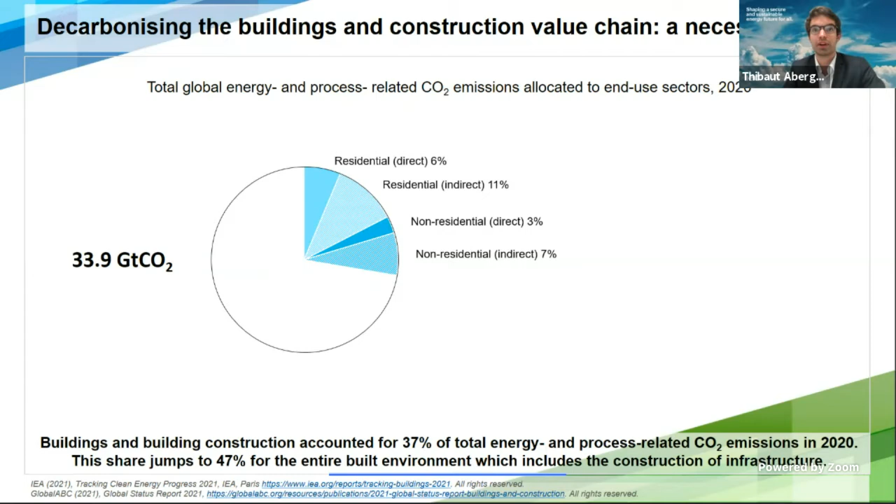Total global energy and process-related CO2 emissions amounted to nearly 34 gigatons CO2. Of this, 27% is due to the operational phase of buildings, whether directly through the burning of fossil fuels in buildings to produce heat for space heating, hot water production, and cooking, or indirectly through electricity and commercial heat generation that is later going to be used in buildings. But as Roland highlighted, we mustn't forget the buildings construction industry, the embodied carbon, mostly from the manufacturing of building construction materials, which adds 10% on top of operational emissions. It brings the carbon footprint of buildings to 37%.

But construction is not only about buildings, it's also about roads and bridges and dams, tunnels, and many things. And the other construction industry is responsible for another 10% on top of this. It means that the built environment, together with buildings and infrastructure, is responsible for 47% of total global energy and process-related CO2 emissions. So it's an understatement to say that buildings are important to the energy transition.

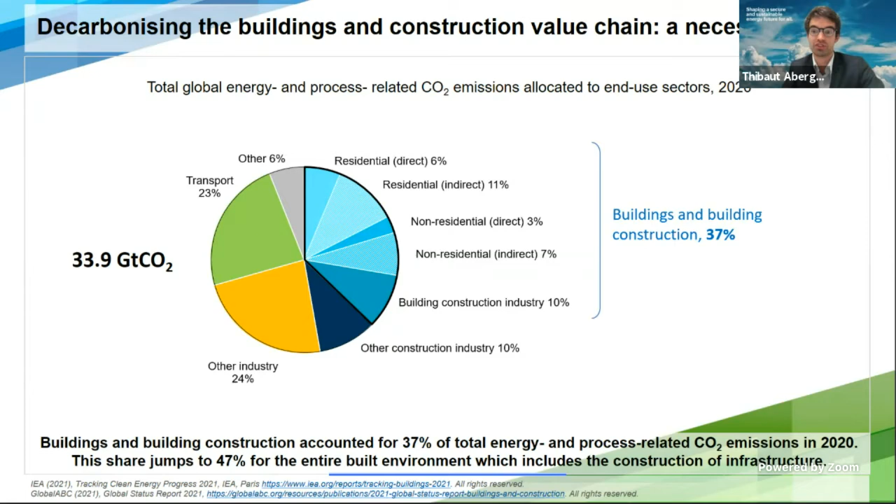The global energy transition as envisioned in the net zero emissions scenario is underlying a massive market transformation. By end use, for example, space heating today represents most of the final energy use, but its share is drastically reduced by 2050 as envelopes are improved. On the contrary, electric appliances and space cooling, for example, are growing as energy efficiency gains cannot offset the growth

for energy service demand. On the fuel side, it means that electricity becomes the primary driver of fuel transformation, with electricity contributing to nearly 2/3 of total final energy use in 2050 in the NZE scenario. Not only the growth of space cooling and electric appliances contributes to electrification, but also the moving away from fossil fuel technologies, as about 45 exajoules of coal, oil, and natural gas were used in 2020 to power

buildings. The electrification trend needs to be complemented with higher shares of renewables, which is direct biomass, solar thermal, and geothermal, as well as an expansion of district energy systems. The final trend that needs to be highlighted in the NZE scenario is the phase out of traditional use of solid biomass, which is responsible every year for 2.5 million premature deaths due to household air pollution. That's more than malaria every year.

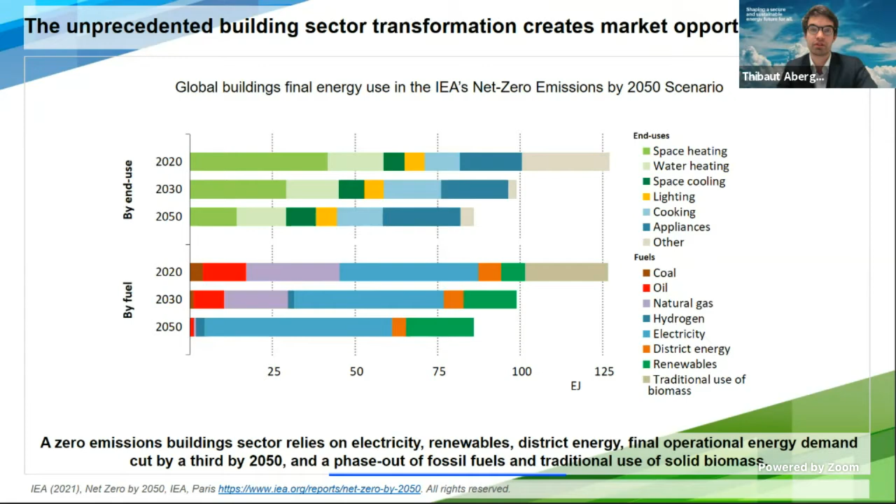It means that by 2030, we are complying with the UN Sustainable Development Goal number 7 on achieving clean energy access. And all of this relies on an overarching target, which is deploying zero carbon ready buildings. A zero carbon ready building is a building that does not need further improvement to operate at zero emissions. The first criteria for zero carbon ready building implementation is energy efficiency.

Today, about 80 countries have mandatory building energy code requirements in place for new construction. But that means that another 2/3 of the countries actually are lacking these mandatory building energy codes, and that last year, the equivalent of the floor area of France was built outside of any regulation. And even if a country has a code in place, as you can see on this graph, more often than not it doesn't comply with a zero carbon ready building requirement.

But in 2030, all buildings for new construction need to comply with this requirement. And on top of this, we need to expand the renovation rate to about 2.5% of the building stock being renovated every year so that we can meet our targets of reaching net zero emissions by 2050. About 50% of the building stock today will continue to be standing in 2050. From an energy efficiency perspective, it means that heating and cooling intensities are going to drop by 50 and 25%

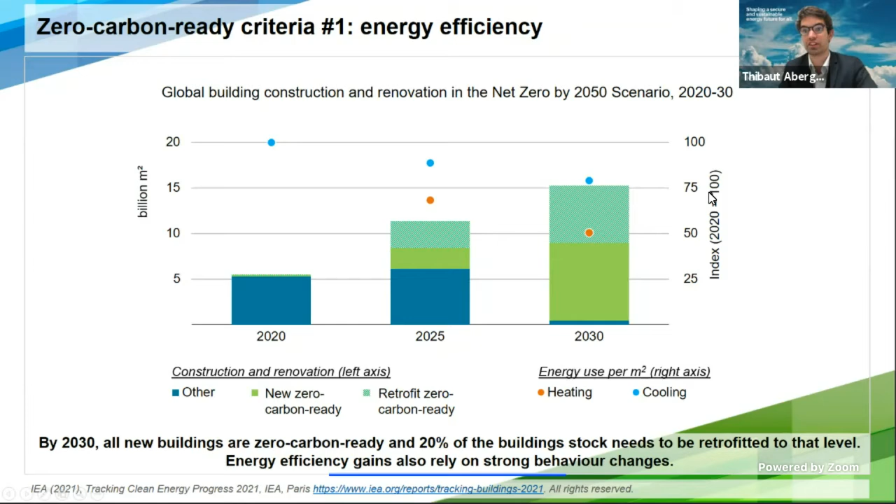respectively by 2030. A second criteria for zero carbon ready buildings is the switch to zero emissions fuels. Today, the global heating equipment stock is dominated by fossil fuels: coal, oil, and natural gas boilers. Altogether, 1 billion units are operating. And these are replaced by cleaner technologies, heat pumps in particular, which are driving the demand for new heat demand.

In particular, they are supplying 50% of global building heat demand in 2050, and they are complemented by solar thermal and geothermal technologies and district energy systems. The share of hydrogen remains marginal because of its inefficiencies and because of safety issues to convert the gas grid and make it compatible with running on 100% hydrogen.

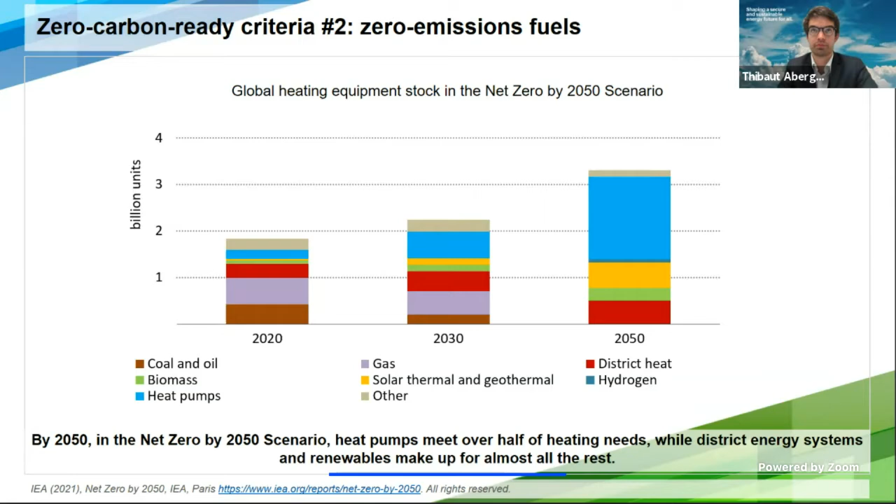A third criteria is to take care of the entire life cycle of buildings and especially reduce embodied carbon. Buildings consume a lot of cement and steel, and this consumption has increased a lot since 2000. Even if it dipped in 2020 due to the COVID-19 pandemic as construction activities slowed down, we see that it can rebound to a level that is unprecedented.

And in the net zero by 2050 scenario, material efficiency strategies allow saving approximately 10% of the total steel and cement demand relative to baseline trends. These material efficiency strategies span across the entire buildings and construction value chain. But the main lever to reduce material use is extending buildings' lifetime through enhanced renovation, but also from the design stage with higher quality components that will make the building's lifetime longer.

It's also a target to make buildings more flexible, to be able to be repurposed at the end of their lifetime. For example, transforming a household into an office to have more flexibility in the repurposing of buildings. Of course, these strategies are complemented with the decarbonization of the industry sector for the production of these materials.

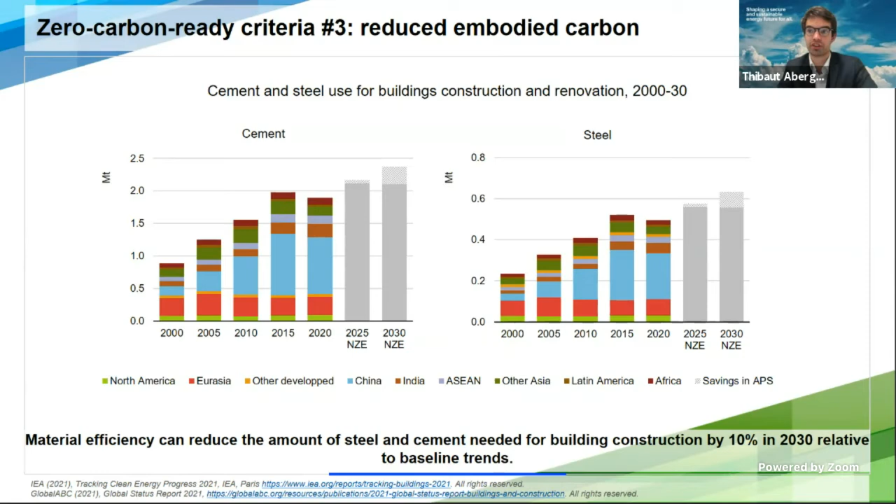The fourth criteria is buildings that need to act within the evolving environment and especially act in concert with the decarbonization of the electricity system. In 2050, 70% of the electricity production is provided by variable renewables. And you can see that the share of demand-side response in intraday electricity system flexibility needs is actually increasing from 5% today in advanced economies to about 25% in 2050.

It means that building equipment appliances need to be responsive, especially heating technologies, to be able to integrate as much variable renewable energy as possible. Of course, there is just not one type of flexibility. In fact, the stability of the grid depends on balancing supply and demand at multiple time horizons, from milliseconds to days to entire seasons sometimes, and at different scales.

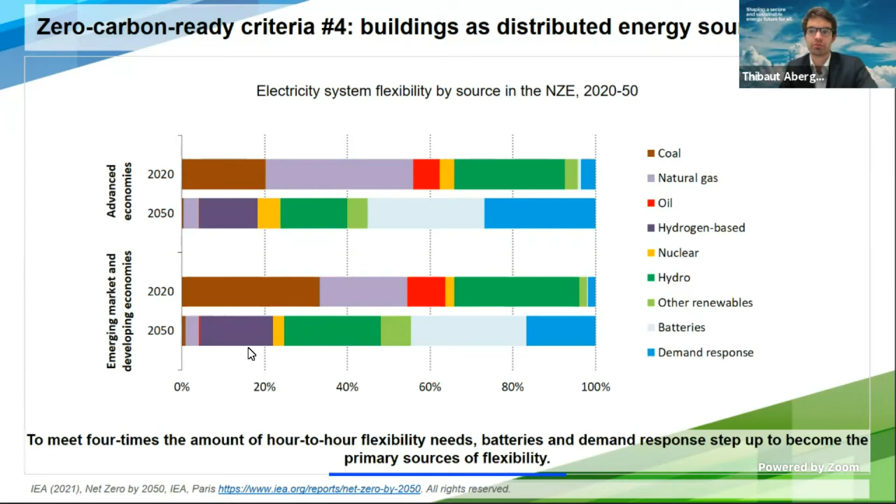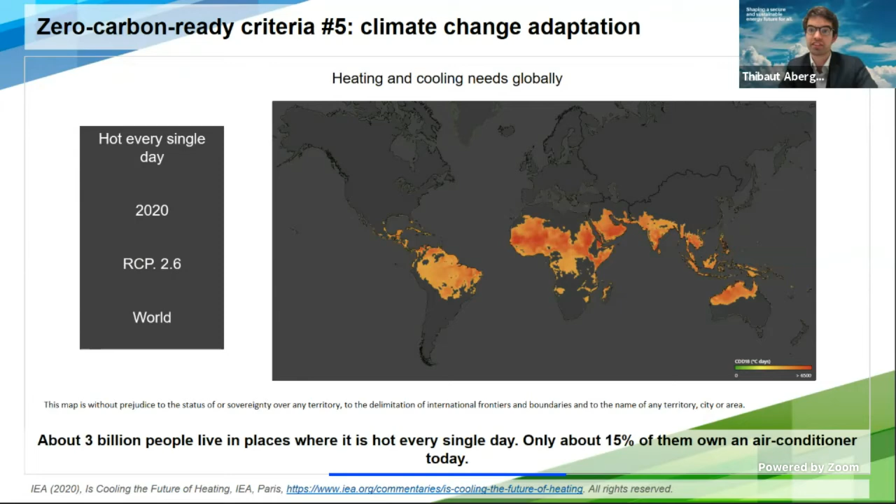It means that new buildings need to prevent growth in cooling demand for those people to live more comfortably with enhanced design, passive measures, and of course, highly efficient and affordable cooling solutions. Global warming is just one effect that needs to be taken into account, but we can imagine many more, such as, for example, rising sea levels, or more often the increased extreme weather events, for example, in the case of storms, which need to be taken into account in building construction codes.

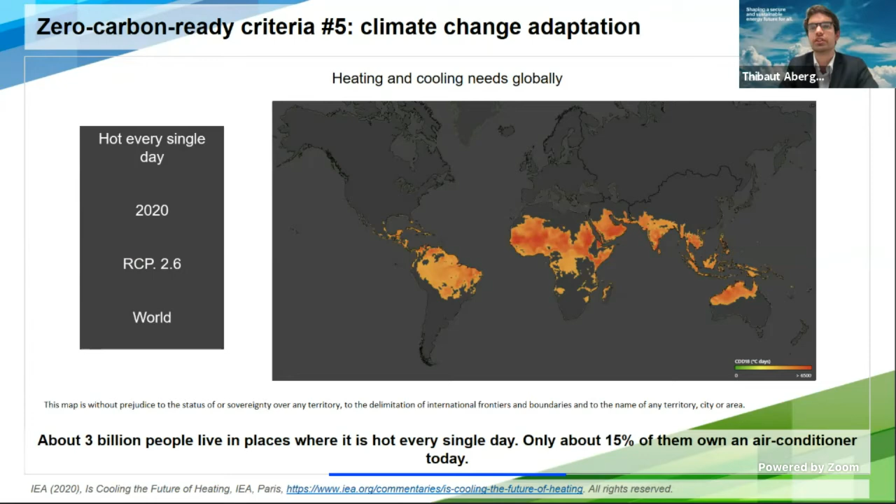As a conclusion, we've mapped out all the different criteria and all the different sub-targets that can be derived from the global target of achieving universal adoption of zero carbon ready building energy codes by 2030. These could span from no new fossil fuel boilers in buildings by 2025 to most appliances and cooling systems being best in class by 2035, to half of heating demand met by heat pumps in 2045.

Of course, each country is free to have its own plans for the transition, and this strategy will depend on its own priorities. But one thing to keep in mind is that this strategy also needs to be compatible with the strategy in place to decarbonize other sectors. In particular, the deployment of material efficiency strategies needs to act in concert with the decarbonization of the heavy industry for cement and steel production, for example, so that they could be rewarded at their fair price.

In addition, the fact that 60% of total car sales will be electric by 2030 provides an opportunity for buildings to take into account this flexibility potential for their decarbonization through, for example, services like smart charging or vehicle to grid or vehicle to buildings. And most importantly, the decarbonization of the electricity system means that a higher share of variable renewables will be seen as time goes, as we achieve net zero electricity globally in 2040.

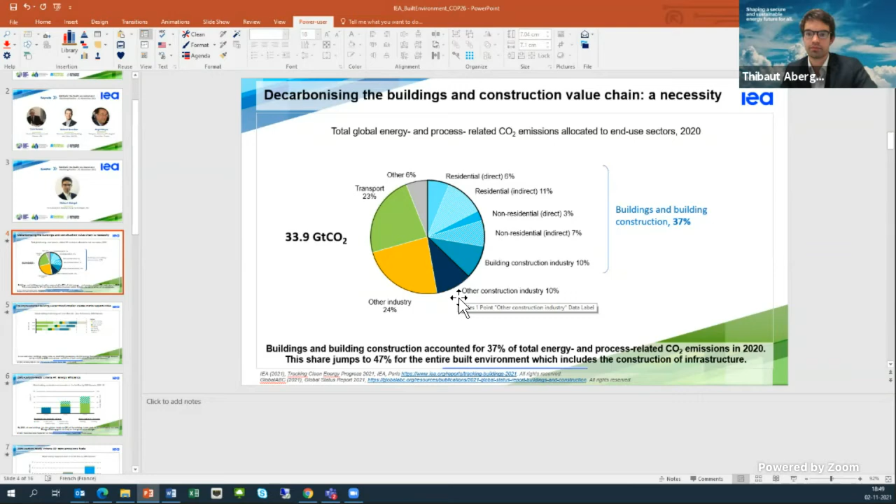Thank you. Thank you for the question as well, and Thibaut for your answer. Any other questions? Please. Can you introduce yourself? Sorry, just quickly your name and affiliation.

So for example, the UN Environment Program, in their analysis, they talk about a sort of ultimate carbon budget. And that to stay below 1.5, we've got a 77% chance with 340 gigatons, 400 gigatons, 500 gigatons. So as we go from the current building sector footprint, call it 34 gigatons annually, if you go to 50% by 2030, that gets us to 17.

And so I'm curious, when you take this analysis on reduction percentages by dates, how does it translate into the ultimate actual carbon expenditure from the sector, and how do we relate to that 340, 400, 500? I can't get the building sector to do anything but use all of the allowance with the rates.